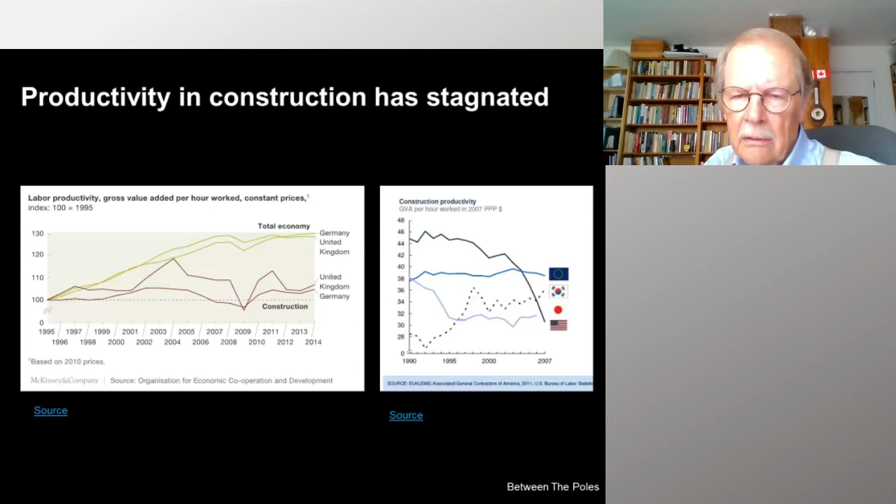Traditionally, construction has invested very little money in R&D. There's a very interesting study done by McKinsey looking at the degree of digitalization of various industries — something like 27 or 28 different industries — and construction is way down, along with hunting and agriculture. So it has traditionally been underinvesting in R&D.

But as you can see, gradually over the last 4, 5, 6, 7 years or so, there's been gradual investment by venture capitalists into startups, and also by well-known companies investing in this area — for example, like Leica Geosystems. You can see that since 2018, it's more than quadrupled, and this is the beginning of a trend for a lot more investment in technology in construction.

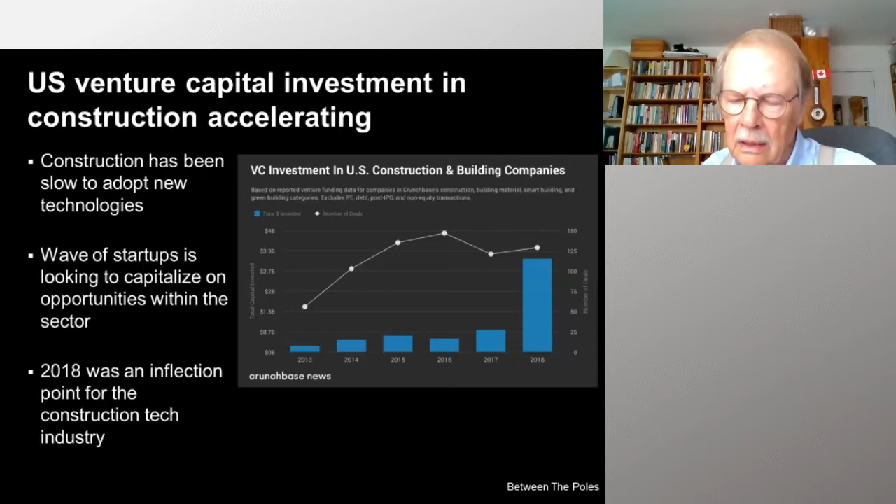So what we're talking about is not something isolated or related solely to underground infrastructure, but a general phenomenon of more investment in technology for construction. So I think most people on this call, just from the survey, are aware that not knowing where things are underground is a real problem.

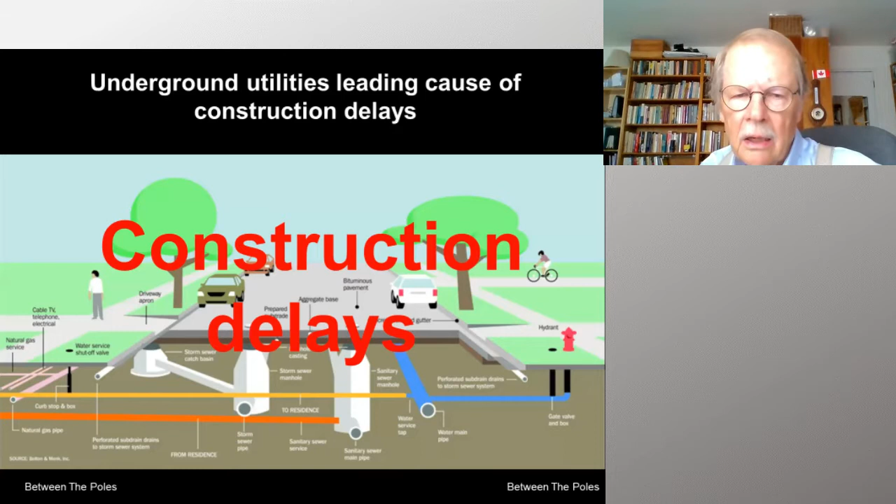It causes construction delays. It's a major cause of delays for highway construction projects. This is a quote right from the Federal Highway Administration.

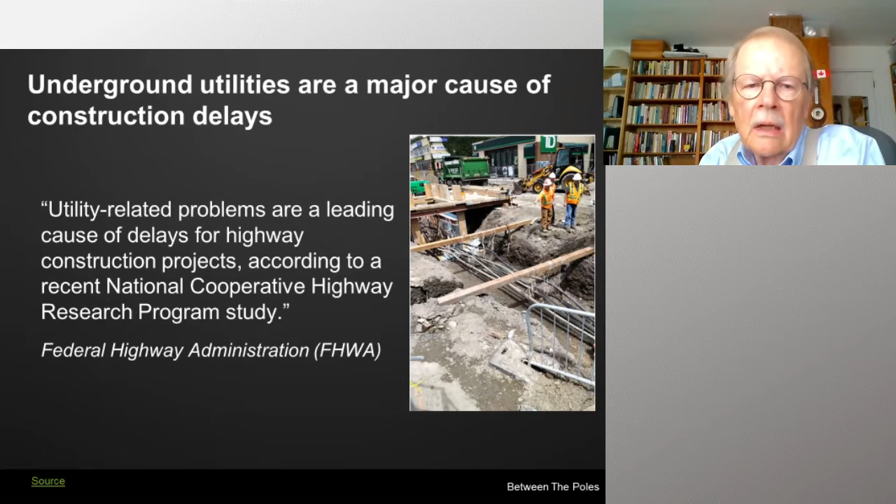I'll give you an example of a very innovative project from the Alabama DOT. This was a major interchange project in downtown Birmingham, a really busy place. What they did, quite different from general practice, is spend several million dollars creating a 3D model of above and below ground utilities. They did GPR scanning, used existing as-builts, did potholing—the normal things you'd expect for locating things underground. After the project, they estimated they saved over $10 million, and probably most importantly, for a highway project of this magnitude to finish on budget and on schedule is quite remarkable.

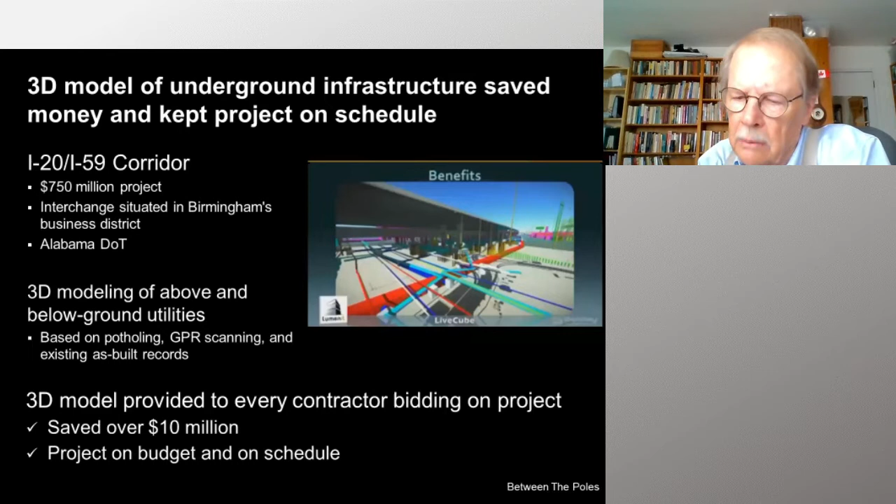This is an interesting statistic I dug up: if you look at the number of deaths from underground utility damage over a period of 20 years, this is from CGA, it's something on the order of over 400 deaths and maybe 2,000 injuries. So this is hazardous stuff.

I think the interesting comparison is with U.S. commercial airline crashes. This does not include Piper Cubs and things like that, but it's roughly the same number of deaths, over 400. This does not include 9/11.

The interesting difference is that the budget for the FAA, which regulates and whose objective is to reduce airline incidents, is something on the order of $20 billion annually. If you look at the equivalent—PHMSA might be the equivalent on the underground side, relating to underground pipelines, mostly gas transmission and hazardous fluid pipelines—their budget is something on the order of 250 million. So we are obviously devoting a lot of money to reducing airplane crashes, and it has worked.

If you look historically, since 1929, which is the high point, it has been a process of continually reducing the number of airplane accidents. I'm sure you're aware just how quickly, with the 737 MAX, after those two incidents, everything was grounded. So there are very detailed processes for managing how planes fly, airports, and so on.

In the U.S., I've estimated that underground infrastructure—not knowing where things are—represents something on the order of $50 to $100 billion drag on the U.S. economy. This is a little difficult to estimate because there are direct costs, meaning what the utility company has to pay to fix the problem directly, but there are also indirect costs, including traffic disruptions, loss of custom, property damage, environmental impacts, legal issues, and injuries and fatalities.

There's research by the University of Birmingham in the UK estimating that it's roughly on the order of 30 times the direct cost, and if you multiply that out by 400,000 to 800,000 incidents—the number from the CGA—it comes out to about $50 to $100 billion drag on the U.S. economy. I think that's an underestimate when you look at all the implications of hitting underground utilities and telecom.

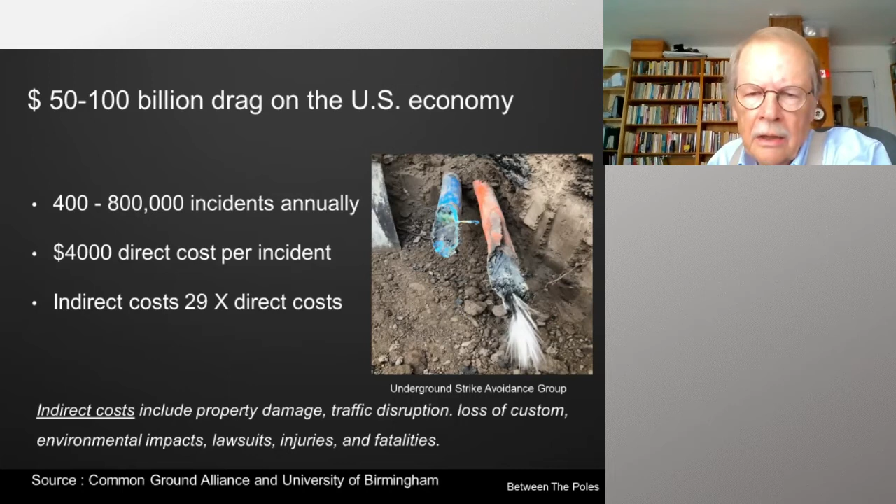Now it's interesting to compare the U.S. and Japan. As I said, in the U.S. it's roughly on the order of 400,000 to 800,000 incidents. The actual number reported to the CGA in 2016 was something on the order of 390,000, but that's clearly underreporting. For that same year, the number of incidents reported in Japan was 134. And I haven't left off zeros or anything on that.

There's obviously something that can be done about this. This isn't just the way business is, with nothing we can do about it. So something can be done.

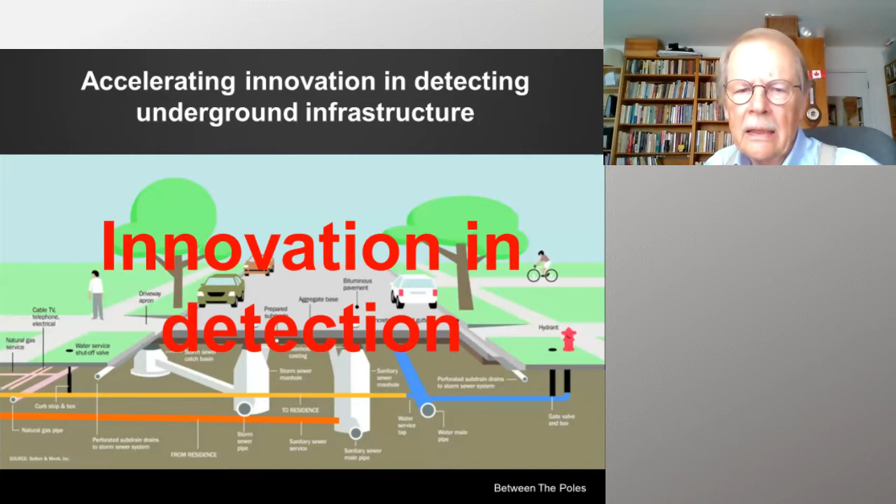I'm going to talk a little about some really interesting innovations. I break it down into innovations in detection, and the other big area is innovations in recording, sharing, and updating the stored data.

You're probably familiar with a lot of these, but I think everybody would agree that EM detection—whether you're talking about 3 or 4 different techniques based on electromagnetic technology—is the most widely used. The last time I did a survey on this, 75% of respondents said they used EM. So EM is widely used, it's inexpensive, and it's very good for conductive underground infrastructure. It can also be integrated, and in this particular instance, this is an example from a company called TerraFlow Geomatics.

They have been able to integrate an EM wand with RTK or RTK GNSS and digital capture to a handheld device to actually record a digital record of the location of underground infrastructure. So this is a big thing from the point of view of not just painting the ground or sticking flags in the ground, but actually capturing a digital record of what you found.

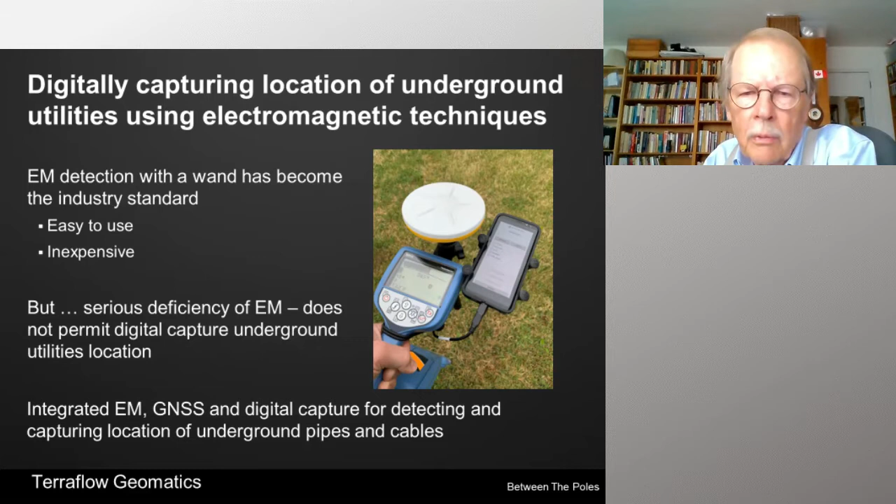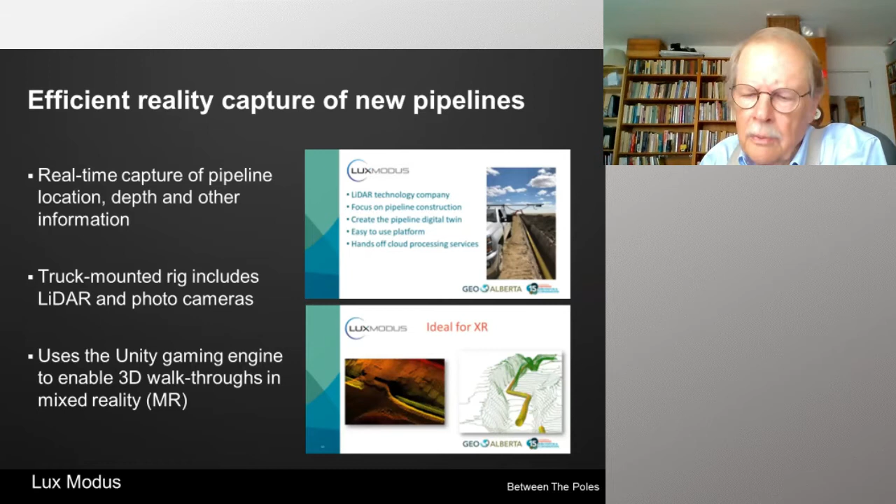Another really interesting way of capturing what's underground, especially for new infrastructure, is basically putting a LiDAR scanner on the side of a pickup truck and running it down the trench before it's filled. This is something that has been done by Lux Modus.

A number of companies now have been able to improve on the speed of capturing ground penetrating radar, to the point where you can run a truck with either a rig behind it, like with a trailer, or with a rig attached to the truck down a road at 130 kilometers an hour and capture a ground penetrating radar scan.

There's a lot of post-processing afterwards to do that. And some systems are actually including not only ground penetrating radar, but above ground LiDAR, so that when you get done with this, you have a record of what's above ground and what's below ground.

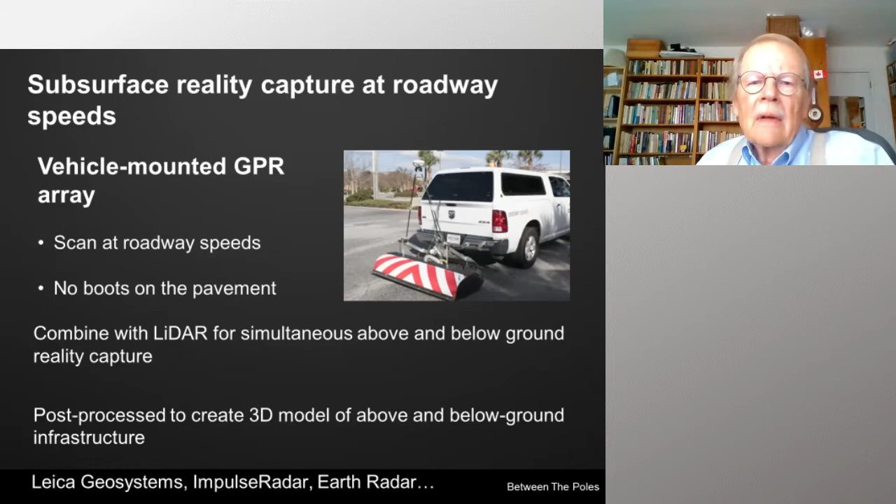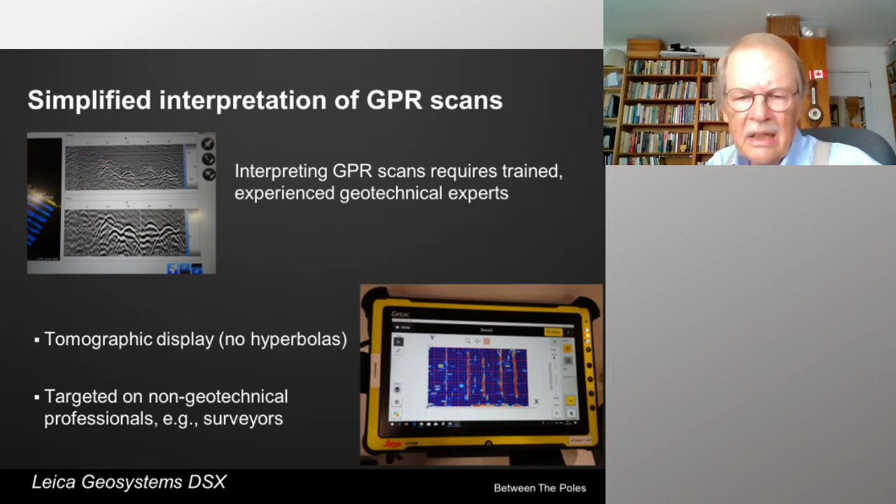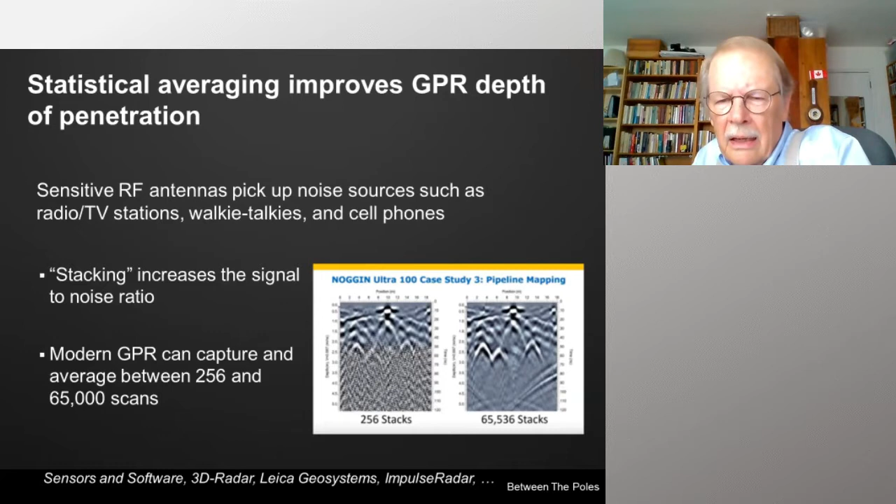Another technique that a lot of GPR companies now are using - this is not a new technique, as it's being applied, for example, in seismic technology. It's been used there for many years - but that is using statistical averaging. It's called stacking, to improve the signal to noise ratio. As you can see in this, this is from Sensors and Software. You can see that the scan is reaching much further down and is showing features with better clarity.

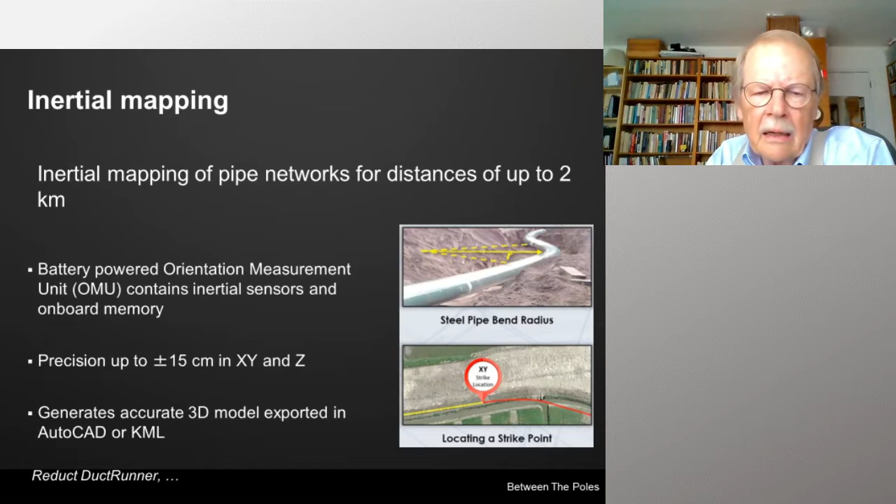Another area that has been used for quite some time, but now because of digital capabilities and batteries and so on, is now being able to be used for distances up to 2 kilometers of underground pipe: inertial mapping. This can actually generate as-built or other types of information with up to 15 centimeter accuracy in all three dimensions, X, Y, and Z. The results of that can be exported for AutoCAD or KML, for example.

Acoustic surveying is also something that's been around for a while, but it hasn't really been applied in this area. But there's some early results that show this is really pretty effective for certain types of underground infrastructure, and that it can be effective down to 30 feet or 10 meters. And it's not affected by soil conditions, which is something that severely restricts how far you can use GPR.

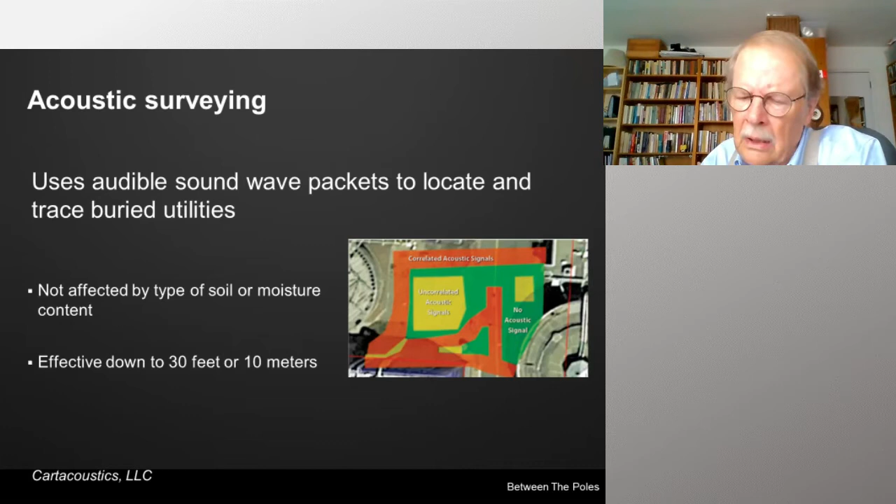Capturing the location of underground utilities to centimeter accuracy generally has required a surveyor, which means if you expose some infrastructure during construction, or if you have just put some new infrastructure in the ground, you need to have a survey crew on site, or you have to call them to your site to do a traditional survey. That is now mandated by several jurisdictions, including Montana, and we're going to hear about that later.

But now there is technology that allows you to capture very accurate as-builts by walking along the open trench, or by capturing the exposed infrastructure with a handheld cell phone. It can be a video, it can be a still photo, or whatever. Generally requires either accurately surveyed control points, or GNSS RTK base stations, and so on, to get the required level of accuracy.

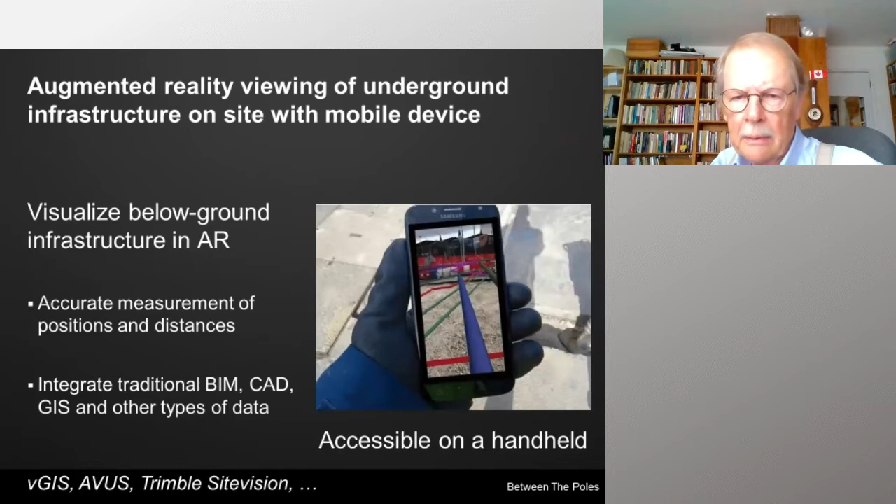Augmented reality, we're going to hear a lot more about this later. I won't spend a whole bunch of time on this, but it's something that allows you to integrate 3D models, CAD, traditional GIS, and other things. There's a number of companies doing this, but it allows you to go out in the field and actually visualize what's underground with much greater clarity than you've been able to do with paper maps, for example.

We're going to hear more about standards in the future later this afternoon. ASCE 38-02 has been around since 2002, and there's a new ASCE 38-20, which I think is available for public comment now, or will soon be, and we're going to hear more about that this afternoon.

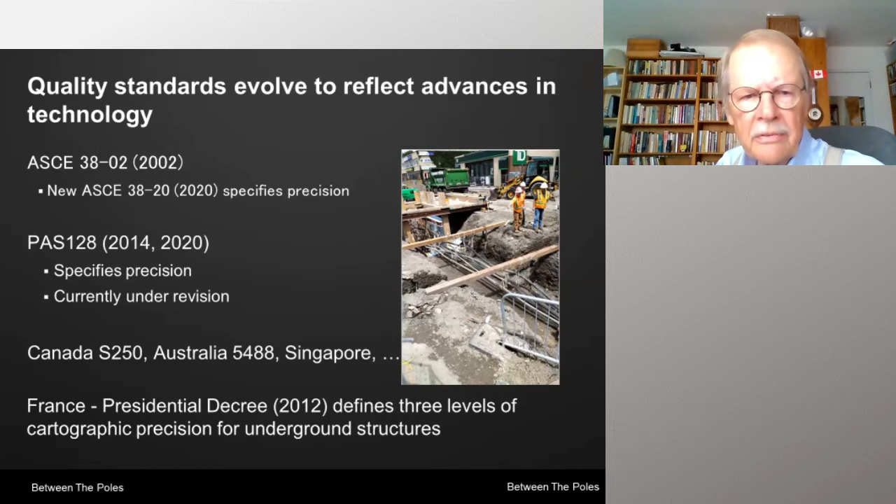In the UK, there's a PAS 128 standard that's used widely, and that's currently under revision. There are other standards in Canada, Australia, and Singapore that are being revised to account for new detection technologies. There's also a standard being developed by the OGC for interoperability. If you're interested, look for MUDDI Standards Working Group—they're looking for people to participate.

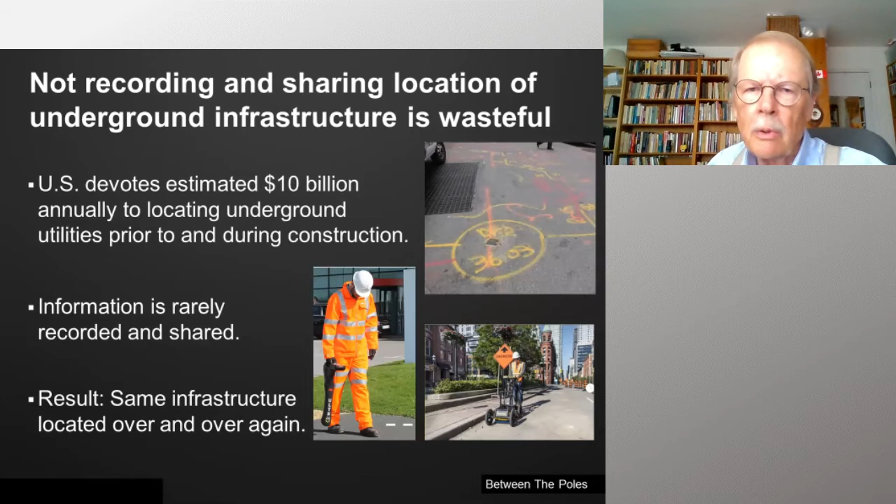Now, the other really interesting area is recording and sharing information. It's estimated the US devotes something in the order of $10 billion a year to locate underground utilities. Often it results in paint on the ground or flags in the ground, but the information is often not recorded and not shared. So if you have to dig in the same place a year from now, the same thing happens—utilities will converge with their magic wands and GPR, finding everything underground over and over again. This is quite wasteful.

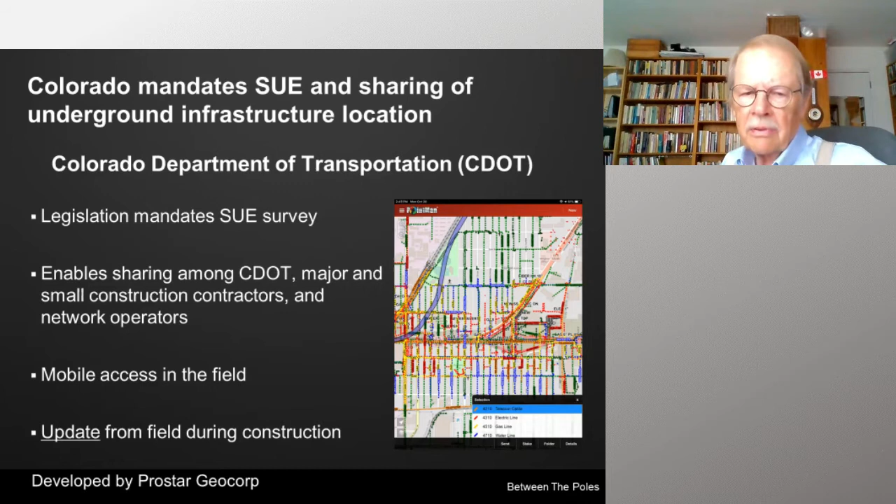A number of jurisdictions in North America and elsewhere are doing something about this. Colorado, I think, has done something remarkable, motivated by a disaster in Firestone about 3 or 4 years ago. This data can now be shared between Colorado DOT, major and small construction contractors, and network operators. It's accessible by mobile devices in the field, and one of the most remarkable things from a data quality point of view is that it enables updates from the field—field folks can update during construction.

I also mentioned earlier that Montana has mandated accurate as-built data. This means anything new that goes into the ground has to be surveyed by either a professional engineer or a professional land surveyor, with accuracy on the order of a third of a foot. The data is recorded in a system developed by GeoWorks—we'll hear from GeoWorks later today—and it's accessible from a mobile device in the field. This doesn't address existing infrastructure, but over time, the quality of location and other underground data is going to improve.

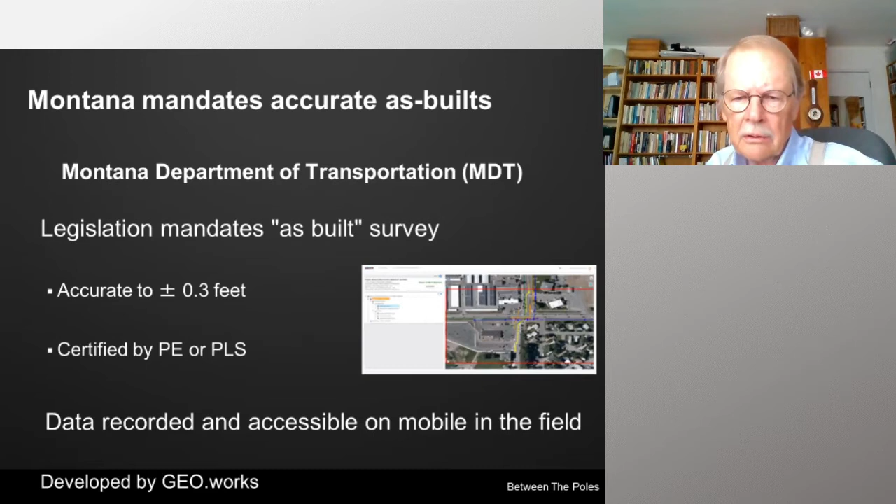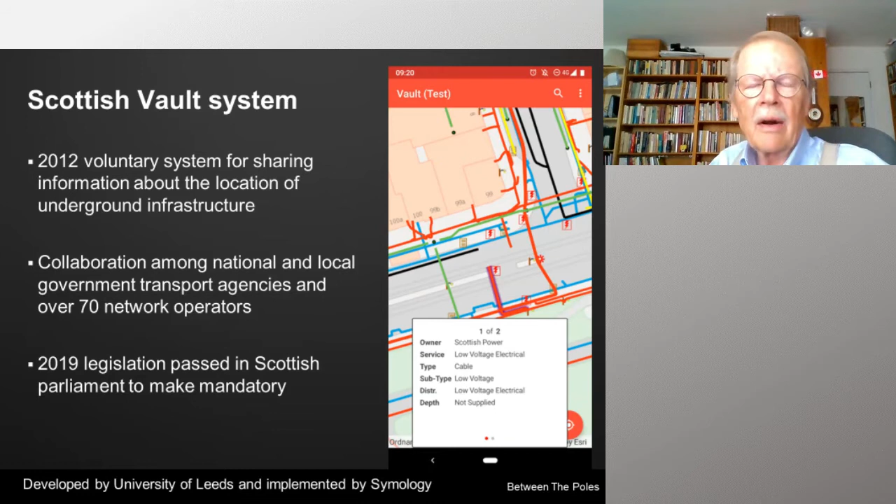There's a lot of interest around the world in this. A national underground asset registry is being developed in the UK by the Geospatial Commission. Two pilots have been completed so far, and remarkably, 40 utility and telecom network operators and local government agencies agreed to share their data for these pilots. This effort has resulted in a harmonized data model, so all this data can go into a common model and be displayed on the same map, with common symbology so everyone agrees on what's represented.

It's also interesting, like the ProStar system in Colorado, that this enables feedback from the field. There's something called observations, which allows people in the field to say, no, this is incorrect—it's the wrong type of equipment, it's in the wrong location, it's off by 5 meters, whatever. As part of the UK pilots, a working prototype online system was developed by the Ordnance Survey for sharing location data over the web to handheld devices in the field. I actually went to the UK and experienced that.

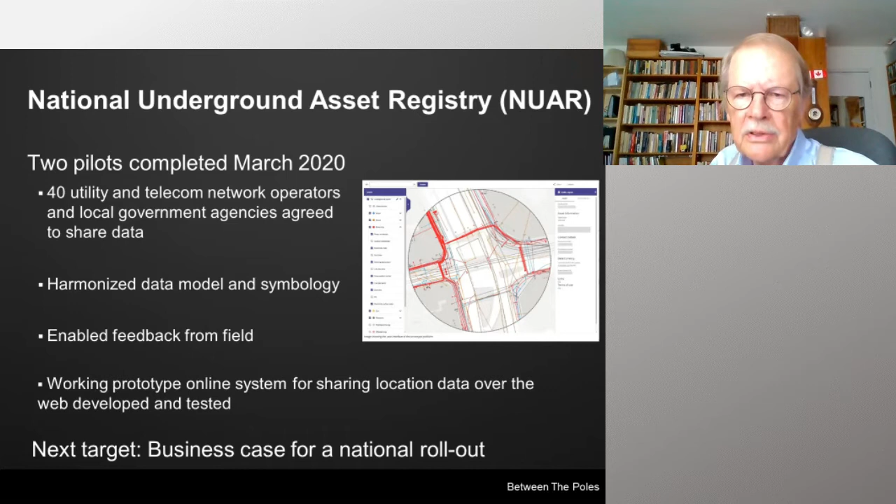The next step on this will be an RFP, a request for people to bid for a national rollout of this system for England and Wales.

The Netherlands developed, quite a few years ago, what's called KLIC, an online one-call system. It is very efficient. You can go onto the system, define a polygon, and within 24 hours you will have a map of everything underground.

It's also now mandatory in the Netherlands to report incidents of underground damage, so there are reliable statistics there. But the very interesting thing, and I'll talk about this in other jurisdictions too, is that so far the statistics provide no evidence that the system has reduced utility damage during excavation.

It has improved construction productivity. It has generated reliable statistics, so you can assess whether new programs have been effective and so on. But to date, just having an efficient system for doing one-calls has not shown evidence that it reduces underground damage.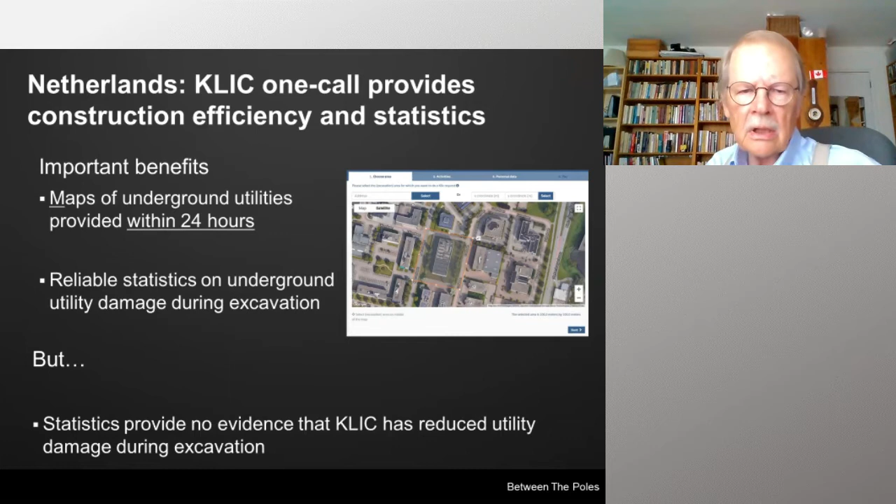One of the really interesting things happening in several jurisdictions around the world is open data. This is a goal, as you know - the U.S. government and many governments have a goal for transparency, for using open data for transparency - but it remains very uncommon among utility and telecom operators, and in the United States, for certain types of critical infrastructure, it's actually illegal.

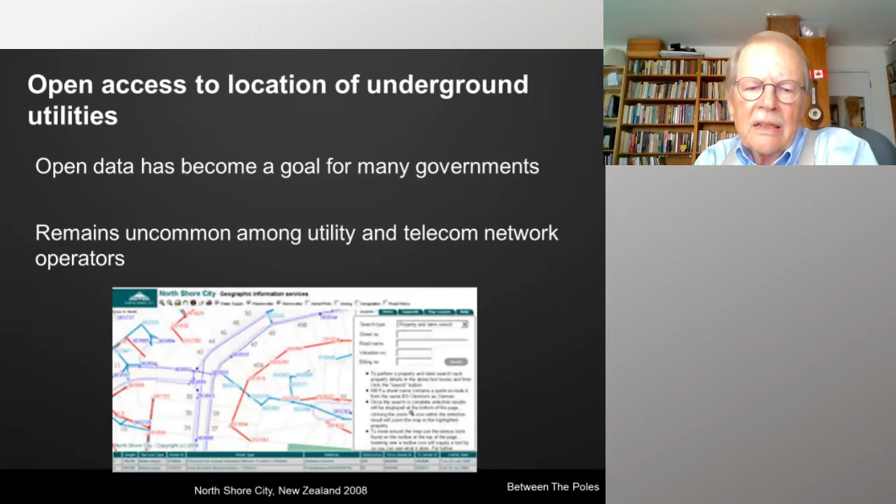I came across it first in a place called North Shore City, New Zealand, in 2008. Australian water companies have made a lot of their data available publicly through open sites.

And one of the most remarkable initiatives in North America is by the Colorado Oil and Gas Conservation Commission, which requires the oil and gas industry to provide maps of flow and gathering line infrastructure. This is often for fracking wells - there's pipes from the fracking wells to pipes and tanks, and from those tanks to collector stations and pumping stations and so on.

The really interesting thing is that you can go to this site and see maps of all the underground flow and gathering lines in Colorado. Again, this was the result of a disaster in Firestone something like three or four years ago. But I think this is a remarkable initiative, that this is publicly available.

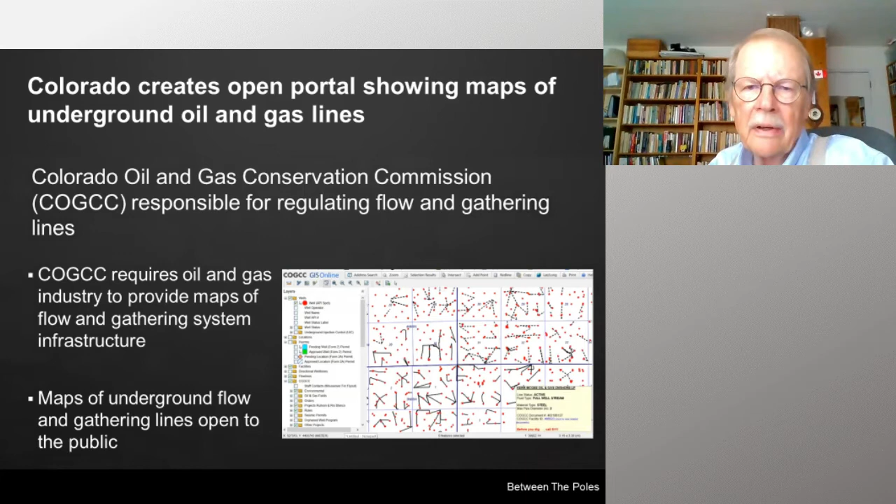As I mentioned, reliable statistics are essential for determining whether you have an effective program for reducing underground infrastructure damage. CGA collects a lot of data, but again, I think everybody at the CGA recognizes that they're not getting everything.

But if they use just what they call consistently reporting sites, and prorate things to the amount of annual construction, the evidence shows that underground damage is not getting better. In other words, it's not being reduced.

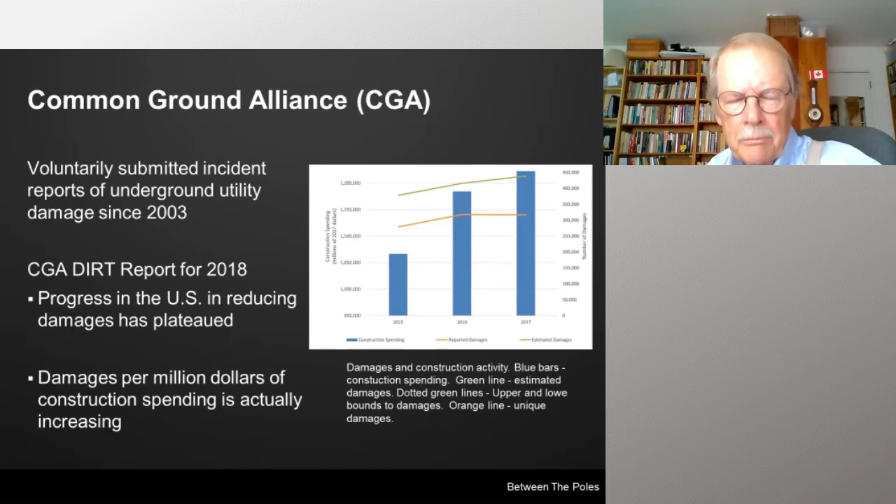In Ontario, there's an affiliate of the CGA called the Ontario Regional Common Ground Alliance. They have very good statistics also on things going on in Ontario, and they report something called the damage ratio, which is the number of incidents per 1,000 one-call notifications.

And you can see that this improved - it improved dramatically through 2014, but since then it is actually gradually increasing.

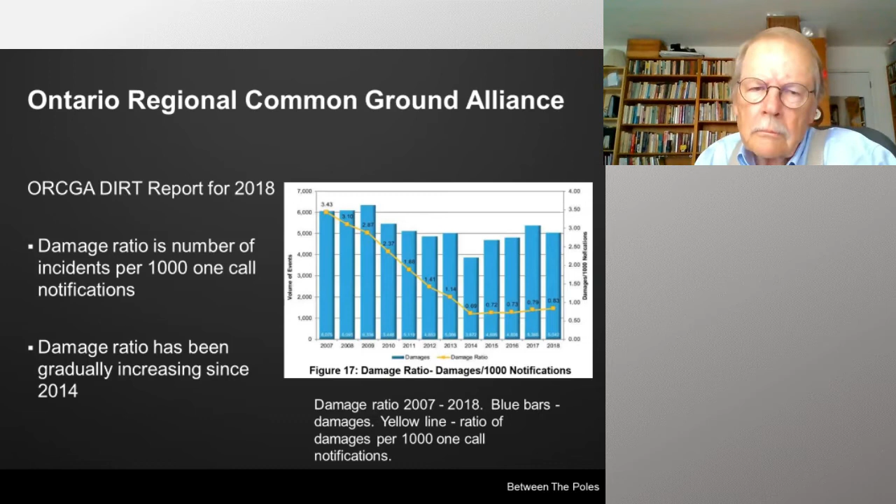PHMSA, as I mentioned before, it's mandatory to report pipeline damage to PHMSA. But they've analyzed the statistics and prorated them to what are called high consequence areas, and they have not seen any significant reduction in pipeline incidents as a result of the measures they've taken.

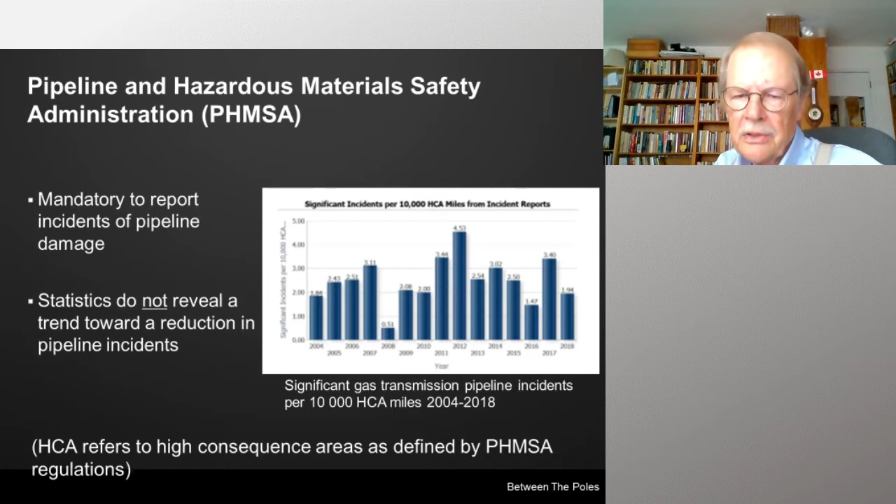HCAs, high consequence areas, was one of the first things they did. They've just recently introduced something called MCAs, moderate consequence areas, to try to address reducing pipeline incidents.

As I said before, the KLIC-Online system in the Netherlands has definitely improved construction efficiency. It's gathering statistics, but it has not reduced utility damage.

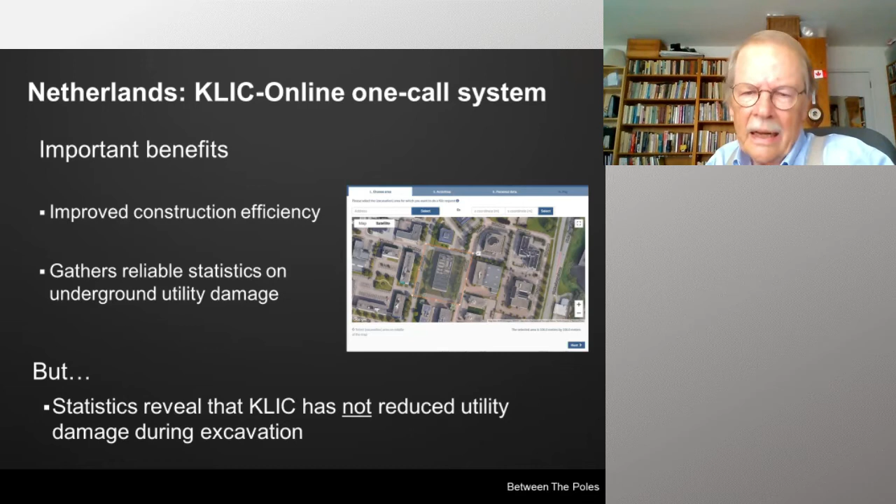The one example where things have improved - there's actually two. There's Japan and Heathrow that I know of. I'm sure there are others, but those are the two I know of. I don't have time to spend on Japan, but they started in 1985, and since then they have reduced their number of incidents dramatically, to 134 in 2016.

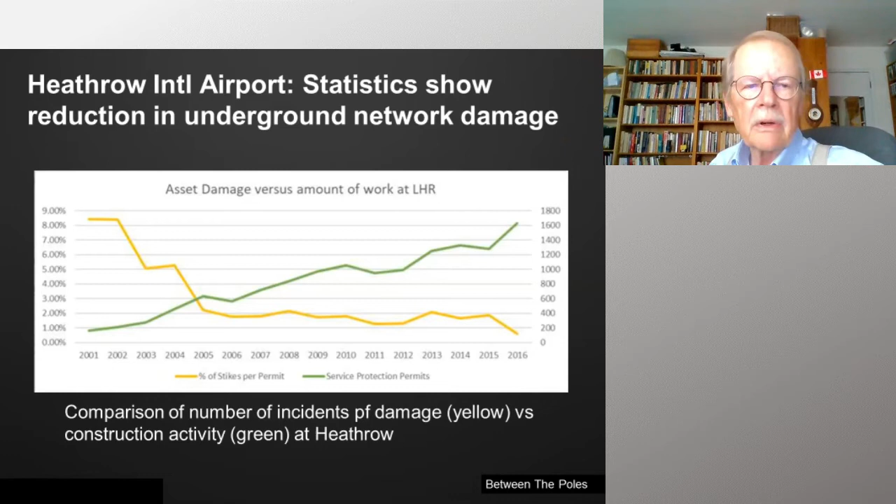So those are two examples, and I think the takeaway from those is that there is really no silver bullet for solving this problem. Having an efficient online one-call system like KLIC in the Netherlands - there's no evidence that by itself it does it.

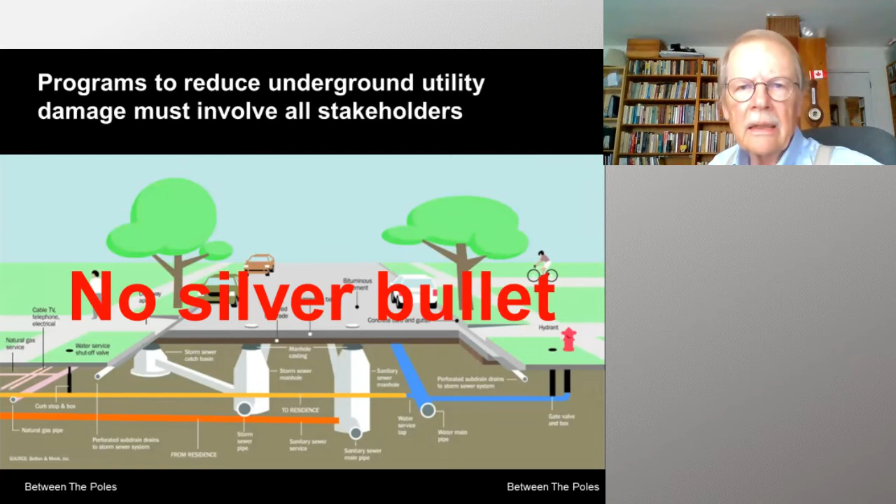Probably, I would guess, because the as-built information that they're getting from the utility operators is probably not at the quality that it should be. There may be other reasons as well.

These are some of the elements that were identified at Heathrow. They have a very complex seven-step process from preliminary design to handover for excavations at Heathrow. It involves accurate reporting of what was put in the ground, other things found during excavation, and so on. You cannot excavate within a certain distance of a utility except using hand digging, vacuum, or hydraulic extraction, based on the PAS 128 quality levels. You have to report any underground services strike, which at an airport is obviously a requirement.

And the other thing that's really interesting about Heathrow is that people involved in detecting and mapping underground infrastructure have to be trained and certified. You can't just hire somebody off the street, give them a GPR, and say go out and find things, or give them an EM device and say go out and find things. Those are just a few.

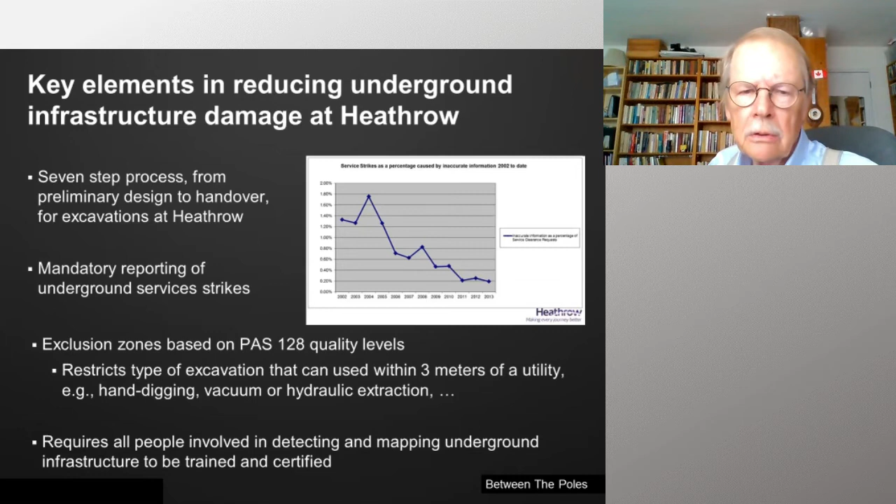I've written a white paper recently together with a colleague of mine, Professor Shinoaki in Japan, which identified 25 elements that can contribute to reducing damage to underground infrastructure. I think from the point of view of innovations, these are probably the most important ones, and these are the things we're going to hear a lot about today.

Advances in detection technology, efficient survey grade capture of new infrastructure in the ground, legislation—for example in Colorado—that requires a subsurface utility engineering survey prior to engineering design, not just prior to construction but prior to engineering design, so you can design things that avoid utilities, which avoids unnecessary relocation of utilities.

We're going to hear a lot about the next one: technology for recording and sharing the location of underground utilities, rather than just throwing away $10 billion worth of effort every year. I mentioned open data, which I think is something beginning to happen in several jurisdictions around the world.

Access from the field on mobile devices seems to be a real requirement of any of these new technologies for sharing information. I've mentioned two jurisdictions that are already enabling updates from the field—the newer initiative in the UK, the National Underground Asset Register pilots, and I expect that will be a requirement when the RFP comes for that project over the next year or so.

But also the Colorado DOT solution also enables updates from the field during construction.

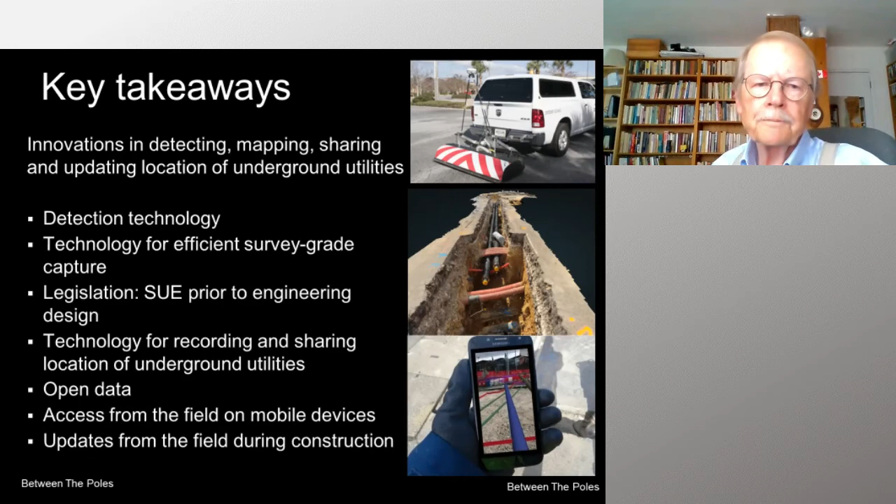And I think those are some of the key ones. As I said, we've just published a white paper that has 25 things that can contribute to reducing damage to underground infrastructure. There are two examples, Heathrow and Japan, where these have actually been implemented and have been shown to work. So I hope that was informative, and I thank you for your attention.